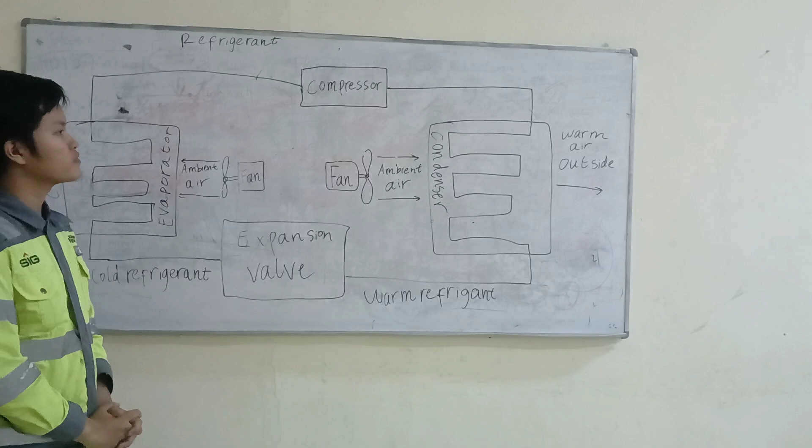Alright, now we are at the whiteboard. Can you explain to us how the air conditioner works now? Okay, first thank you for your opinions, Raihan and Oscar. So now we will mainly discuss the cycle in the air conditioner, or how the air conditioner exactly works. So basically, first we will talk about the parts.

See here, there is something called refrigerant. Refrigerant is one of the major important parts in the air conditioner. Refrigerant is basically some sort of special liquid which can change its temperature easily, and that's why refrigerant is used in air conditioners.

So first, the refrigerant goes to the compressor, which changes its temperature after it gets pressed in the compressor, from cool refrigerant to warm refrigerant. After the cold refrigerant goes warm, it then goes to the condenser, which, as you can see here, has a design like this.

This design is important because the structure was made so that the refrigerant will move through the condenser even slower, and because there is a fan here that is used to cool down the refrigerant, so that the refrigerant itself goes from warm to a little cool refrigerant.

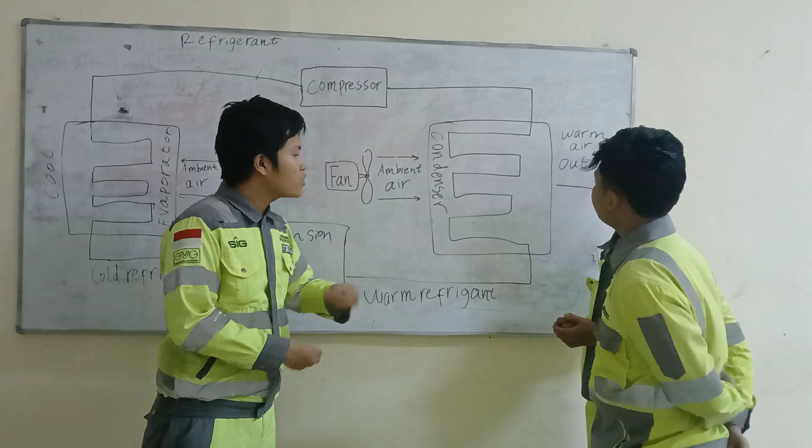You can usually see it on the back of the room, and after that the already cold refrigerant goes to the expansion valve. The difference between the hole in the expansion valve, from small to bigger, makes the refrigerant even cooler, and that's why we call it cold refrigerant.

After that, the cold refrigerant goes to the evaporator, which has a quite similar function to the condenser, used to slow down the movement of the refrigerant, so that the fan can distribute the cool temperature to the room or around the room.

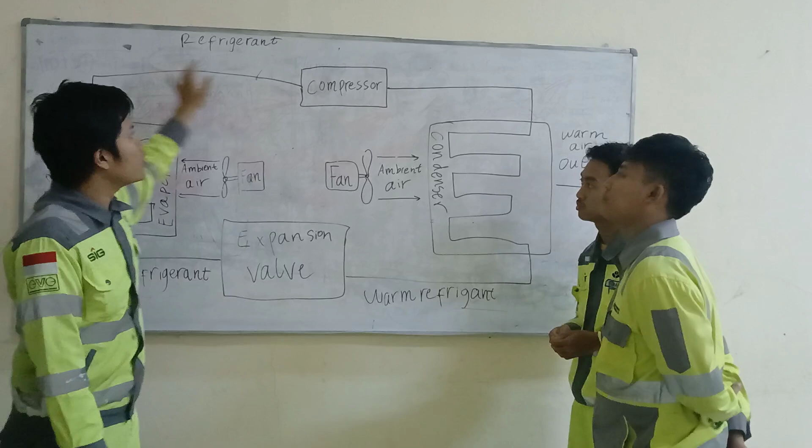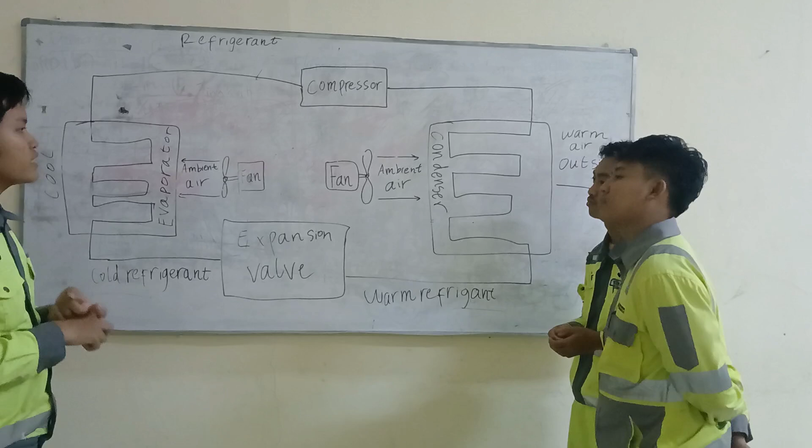And after that, the cool refrigerant goes back to the compressor, which then forms the cycle of the air conditioner's function. And that's why it's one of the cycles which is a repeated occurrence. Okay, that's all I explained.

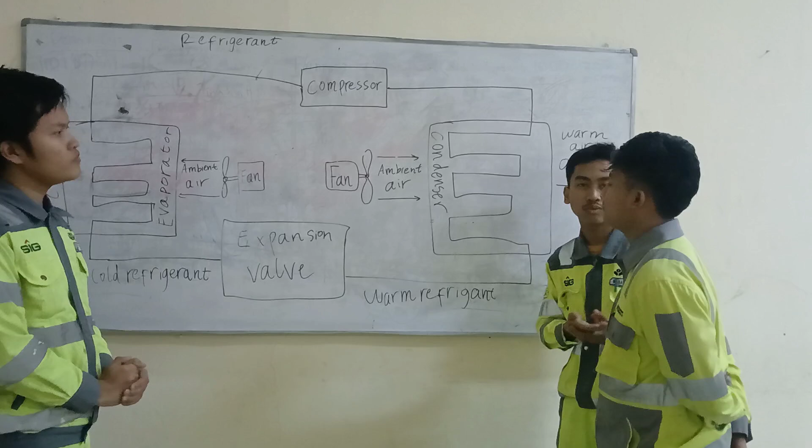Alright, I think maybe we have some questions. Maybe Raihan, you want to ask first, or should I go first? Okay, maybe I will go first for the question.

Is the type of gas used in the air conditioner freon gas? Yes, it's freon gas.

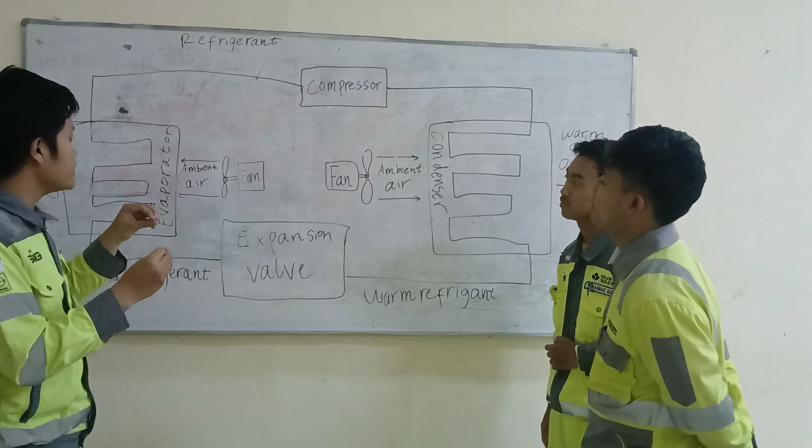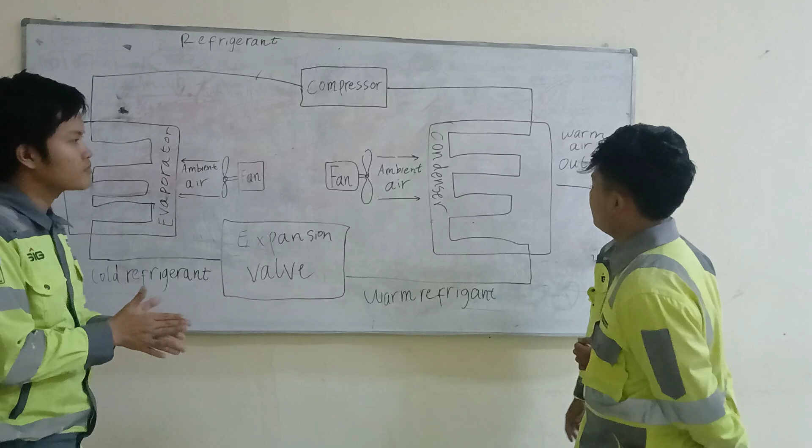Alright, and then I want to ask about the expansion valve. I thought the expansion valve just reduces the pressure of the refrigerant. So it will also cool or reduce the temperature of the refrigerant. The expansion valve can also reduce the temperature even more, because there's a slight difference between the smaller valve and the bigger valve, and when something moves from a smaller hole to a bigger hole, it changes temperature, because the expansion itself cools down the refrigerant. Alright, Hadif, thank you for the answer. Maybe that's just my question.

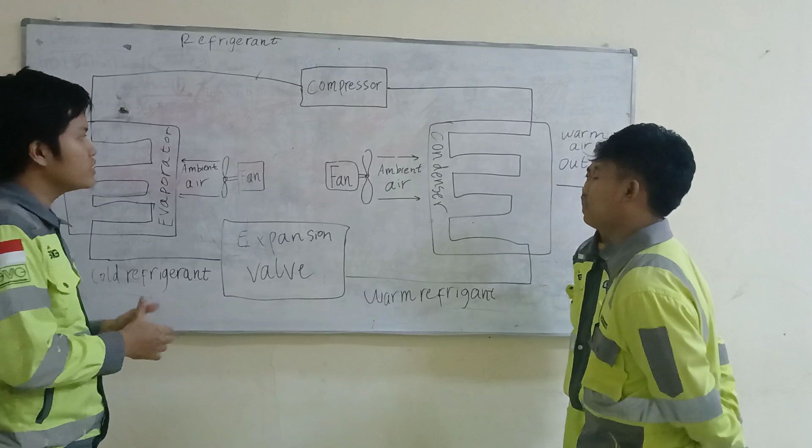Now Rehan, maybe you can ask your question to Hadif. Okay Rehan, did you have any question? Okay Hadif, can you explain it in a more descriptive way?

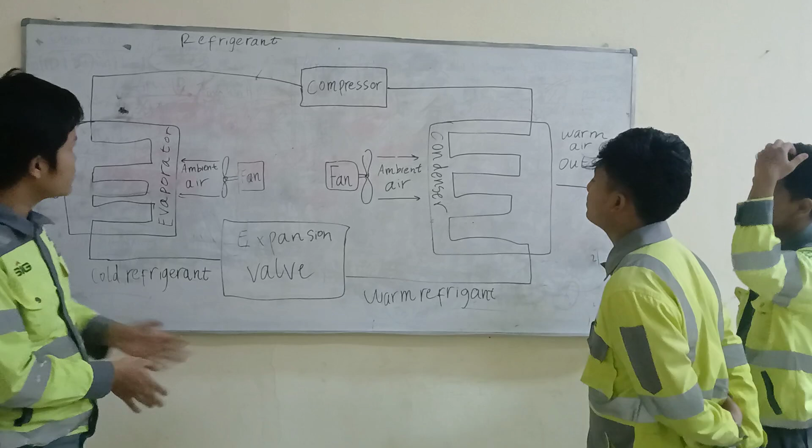Okay Rehan, so basically as you can see here, there's compressor, condenser, expansion valve, and then evaporator. So first we'll talk about the compressor. In the compressor there is pressure which can press the refrigerant and change its temperature.

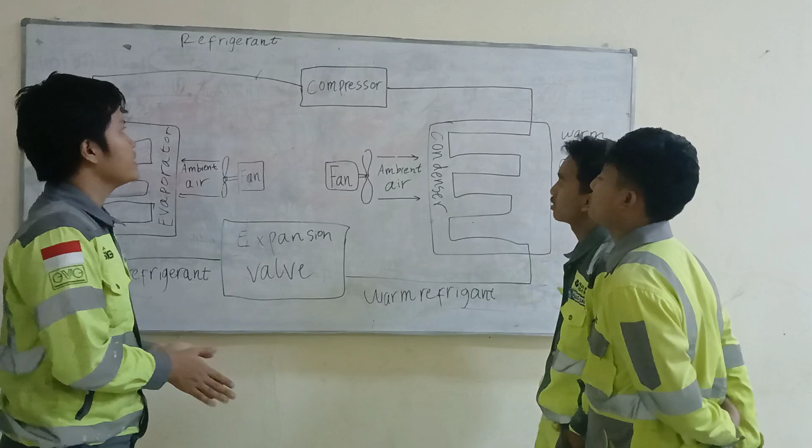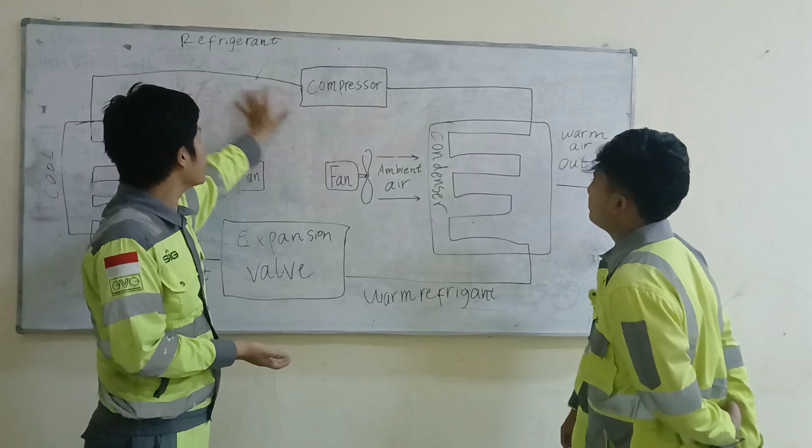Why can it change temperature? Because when you press something at high pressure, it creates energy, and that energy can make something hotter. In this case it's the refrigerant, and that's why the compressor turns the cold refrigerant into warm refrigerant.

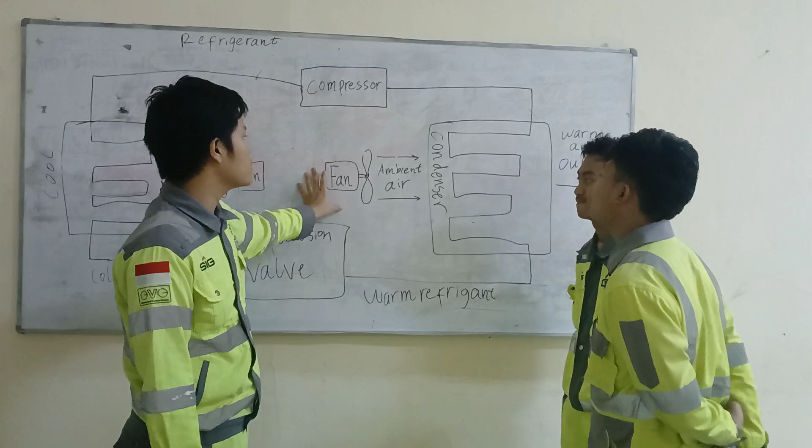After that, the condenser is only used to contain the refrigerant and hold it a little bit longer, so that the warm refrigerant can reduce its temperature by fan. The fan itself transfers the warm temperature to the outside, so that it doesn't go into the room.

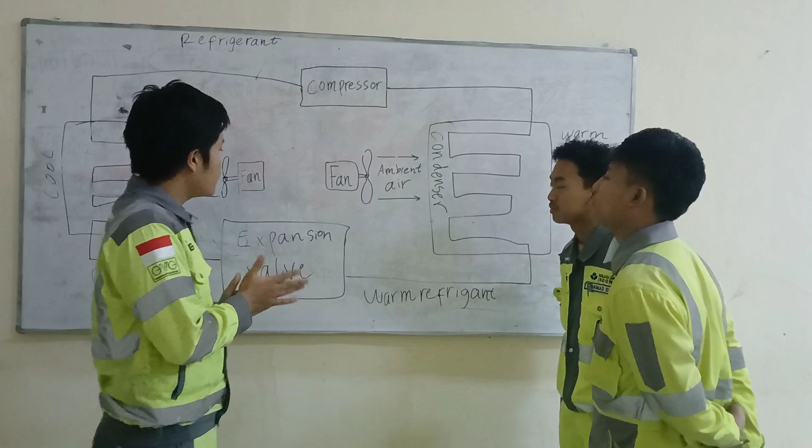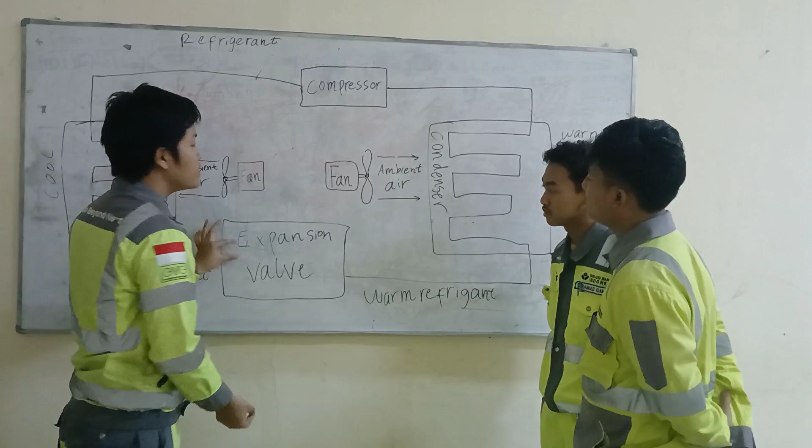Or the condenser can also make the refrigerant go slower, and then, as the expansion valve - as you already heard in my explanation - it's just a valve that goes from a smaller hole to a bigger hole, and due to the expansion and movement of the refrigerant, the refrigerant gets cooler.

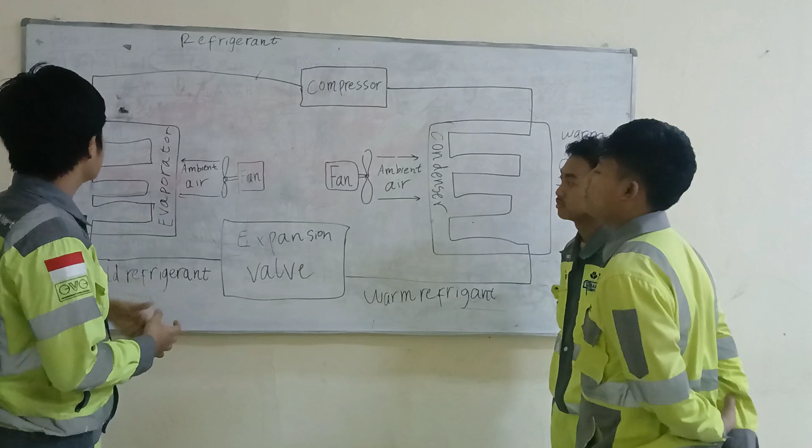After that, the already cold refrigerant goes to the evaporator, which then goes into the fan so that the fan can distribute the cool temperature from the refrigerant to the room.

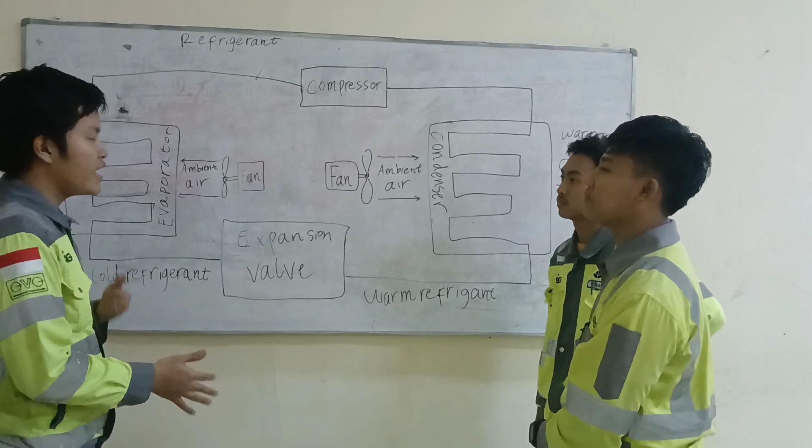And same as the condenser, it has a design like this so that it can hold on a little bit longer and distribute air even more. Also for information, the evaporator itself usually has some sort of water.

You see, in the air conditioner there is water. Why is there water? Because the refrigerant itself also catches the moisture in the air. That's why the air conditioner usually has some sort of wet air, if you understand what I mean.

Okay then Rehan, is the explanation clear? Clear explanation? Yes, I do.

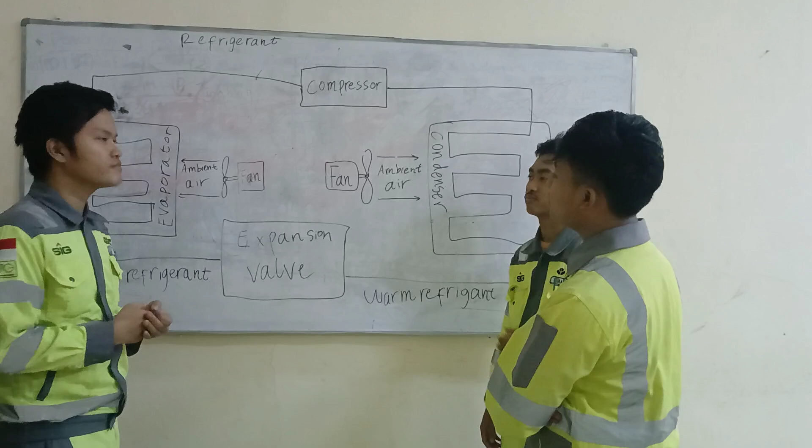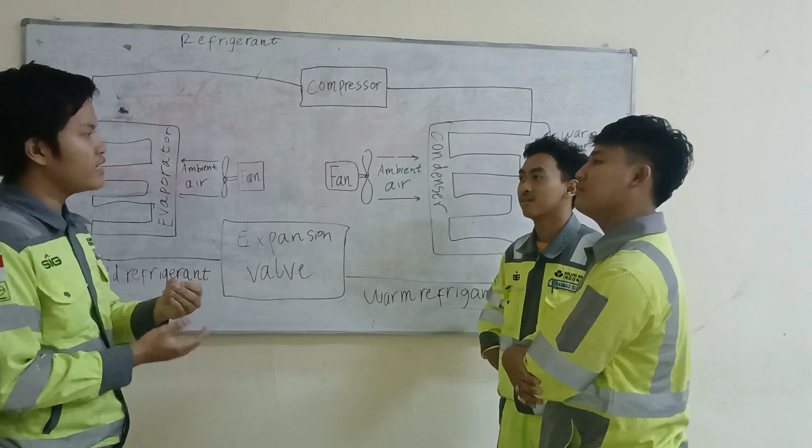Okay then, alright Idam. So after I talk about the air conditioner, how about you explain to us about the cycle, but in an electrical motor - I hear you are in instrumentation training in electrical, so I think you can.

Okay everyone, after I explained about the air conditioner work or cycle, can anyone explain to me one more example of a cycle in machine parts?

Okay, I think I have a new example about the cycle in machine parts. Maybe I can explain to you about the cycle in the engine, how the engine works. Okay, that will be my question - I'll certainly be curious about the engine stuff you're talking about.

Okay, maybe we can go to the board, and can you give me some time to write and draw how the engine works? Okay, no problem, I will give you some time.

Sorry Han, did you still want to learn about another example of a cycle, or will you just leave? Okay, I will stay. Okay, so we will wait for Idam to draw the examples. Let's go. Okay, give me an example, I guess.

Yes, okay guys, now we are at the whiteboard, and it's the four strokes of the engine - how the engine works. Okay, so first I will explain to you: the engine works in four strokes, as it's called.

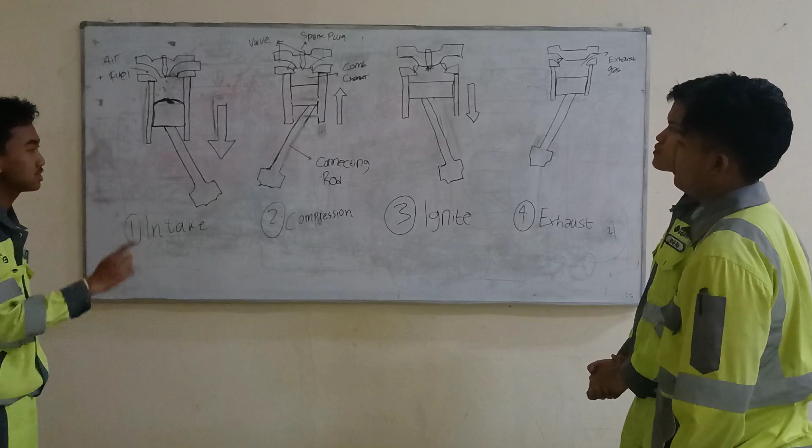Yes, in order. Okay. Now I will explain to you how intake works. First, the intake valve of the combustion chamber will open, and the air and fuel will be charged into the combustion chamber. The air and fuel can get into the combustion chamber because the piston is moving backward.

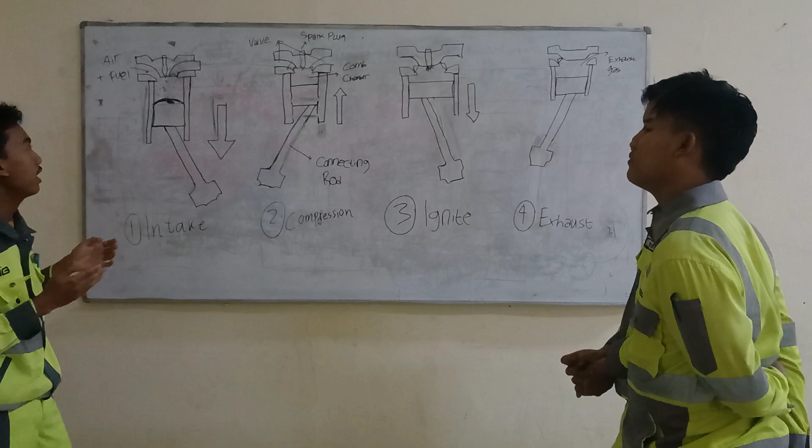And the second is compression. What happens in compression? The intake and exhaust valves will be closed, and the piston will move forward in the combustion chamber, and it will make compressed air. So the temperature of the air will be very high. And the third is ignite. In ignite, the piston will move backward after the spark plug ignites, because of the high temperature of the air and fuel here. And then the last is exhaust.

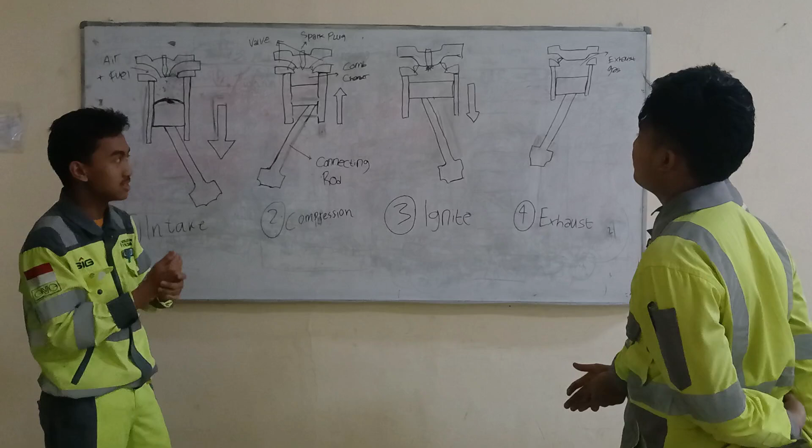What is happening in the exhaust? The exhaust gas will go out because the piston will move forward. So it will push the exhaust gas out of the piston. So it's called exhaust.

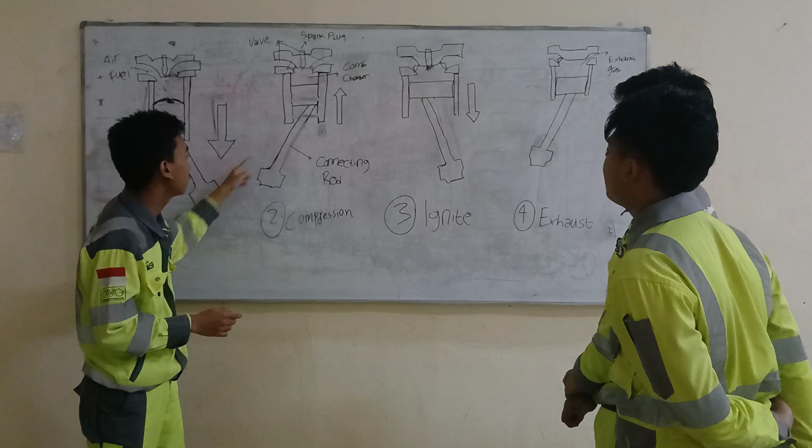I forgot. I will explain to you the components of four-stroke engines. The first is the connecting rod. The connecting rod's function is to convert the rotary motion from the crankshaft to reciprocating motion. Here, this one. So the rotary motion of the connecting rod in the crankshaft will convert to a reciprocating piston. And then the second is the combustion chamber. It is a place to make compressed air so the spark plug can ignite it.

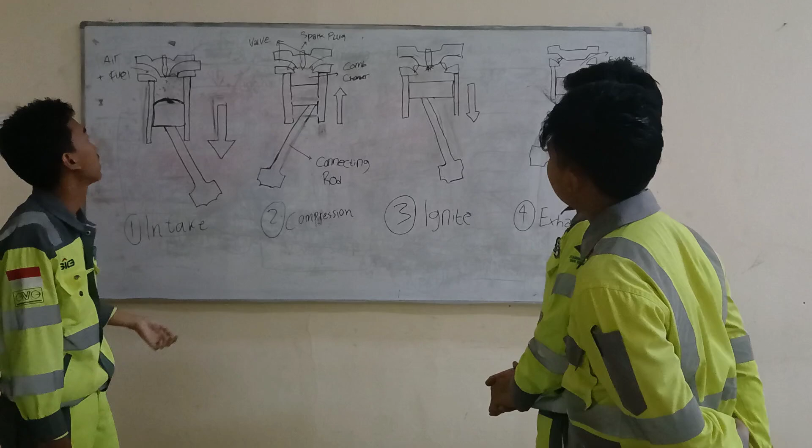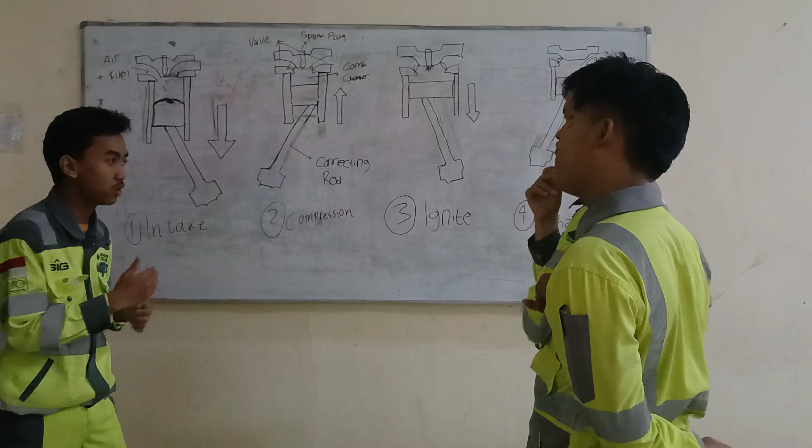And then it has two valves. This side is called the intake valve, and this side is called the exhaust valve. And then the last is the spark plug. Its function is to make the engine of the motor work. I think that's enough from my explanation. Do you guys have a question?

Maybe we'll need some more explanation regarding the function of each part of the cycle. For example, what is really the function of the intake, what is the function of compression, what is the function of ignite, and lastly, what is the function of exhaust? And what if, for example, we skip one of the cycles? Oh, okay, I got it.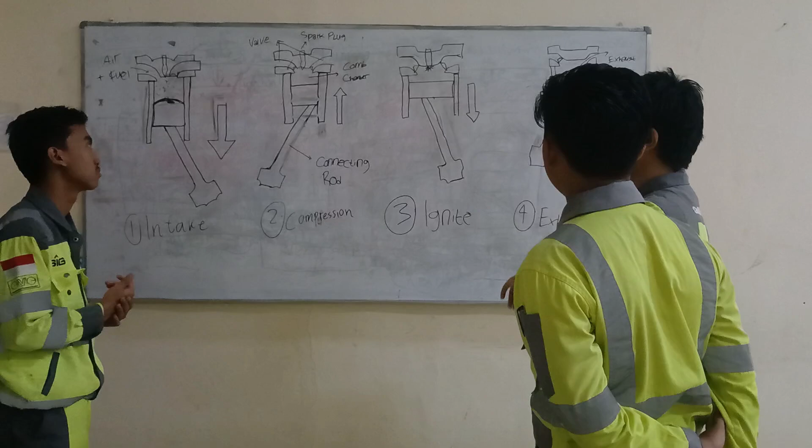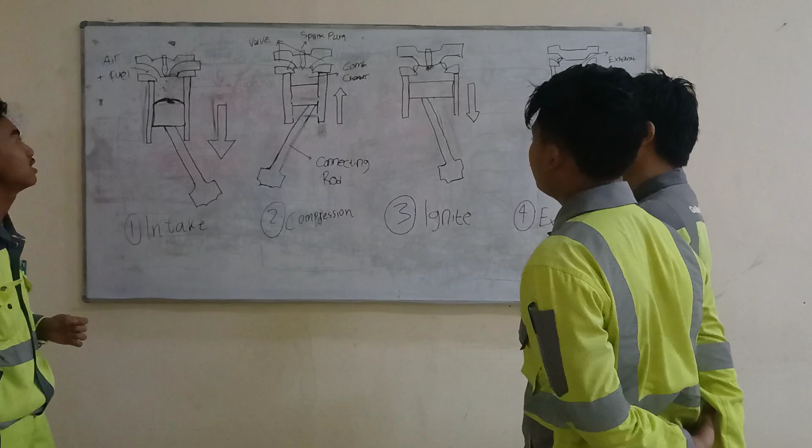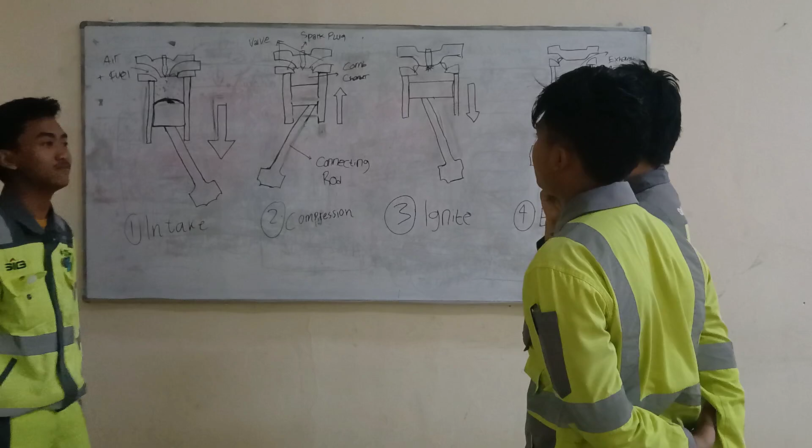It will not skip the cycle, because the piston is moving forward and backward. If you see here, in the intake the piston is moving backward. So if we skip the compression stroke, the piston will not move forward. So in ignite it will not go backward again. I think that's why. And then the engine will not work if a stroke of the engine is skipped. Oh, okay. Is skipped. I understand now.

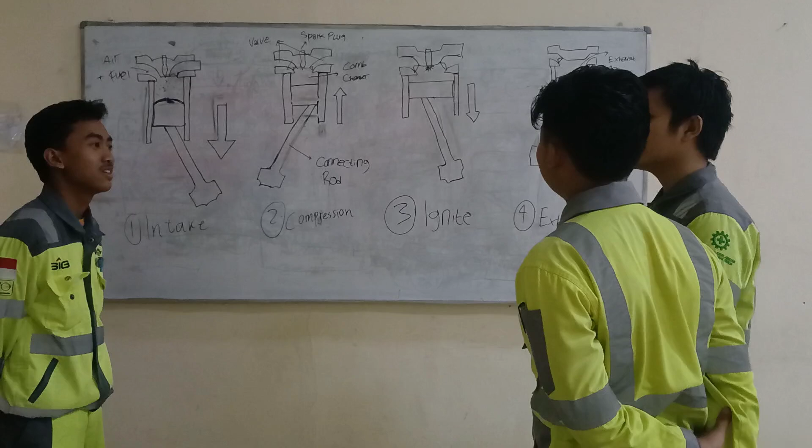So, Rehan, do you have any more questions? No. Alright guys, that's all my explanation about the cycle in 4-stroke engines. I think that's enough for you guys.